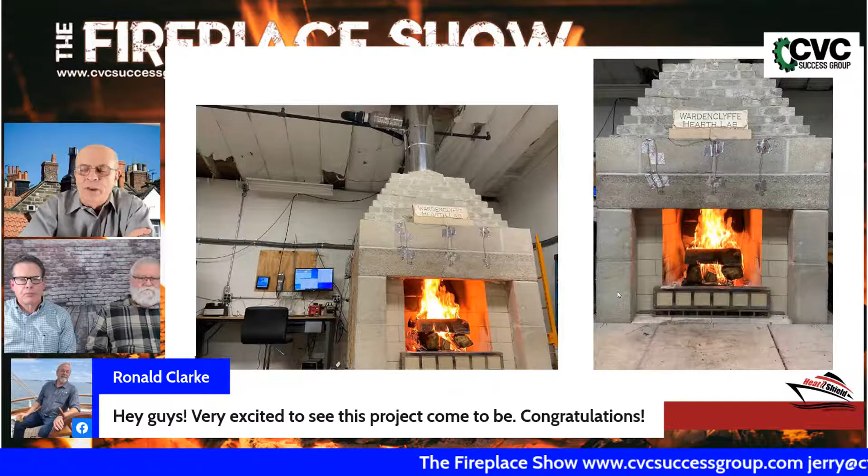Right. I think one of the things we need to point out to anybody watching this is this is one of the first looks that many people, even in the industry, have ever had of this product, except for a select few. So what are we looking at right now? What are those two pictures showing us? Well, that's just a picture of the lab, and shows some of the instruments and some of the stuff that we were doing to test the safety, efficiency, and the radiant heat output of the fireplace. Yeah, this is our lab, actually. This is the Wardenclyffe lab. So that's located in Richmond, Indiana, where your plant is, John. Am I correct? Yeah.

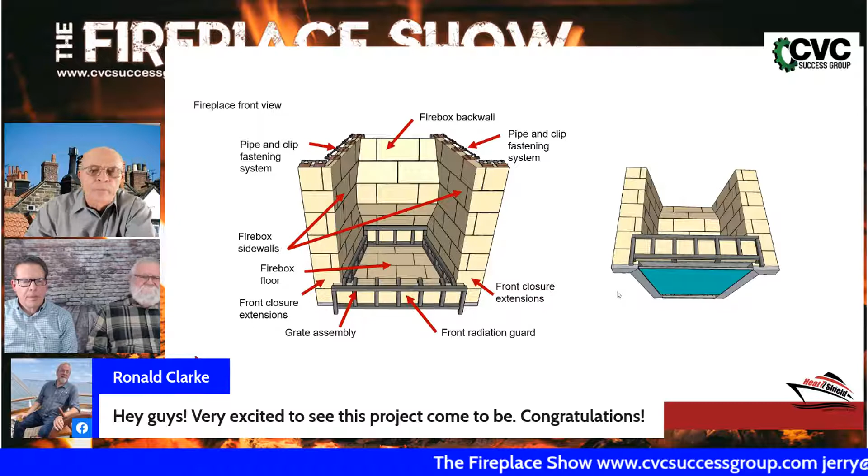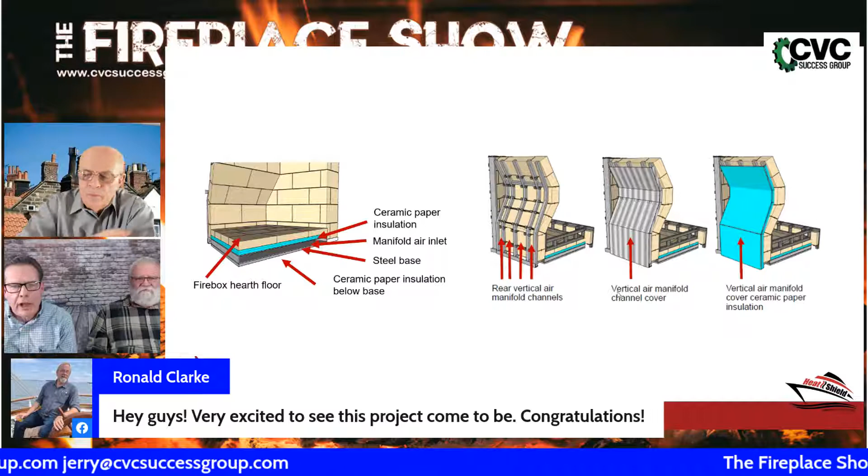Okay, so you ready for me to go to the next slide? Yeah, go to the next slide. And these are just some drawings that just kind of show you. These are actually some of the patent drawings we put together. But go to the next slide, because I think... Yeah, this is a good slide.

This shows the air movement underneath the fireplace and how it gets injected over fire on the back wall. So what's unique about this fireplace is there's actually no mortar joints in the back wall. So the mortar joints that you typically fill with mortar, we're using those to siphon in the air, and it gets injected into the fire, over the fire.

And so what happens is, as you introduce preheated air into the fire, at that point it burns off hydrocarbons or particulates or soot or creosote, if you will. And so it produces a much cleaner burning fireplace. Yeah. Okay, so let me identify this. Right now, we are looking at a side angle. So you're seeing the red arrows, there's 4 of them there on the left-hand drawing.

So Chris, one of your specific designs is a rear firebox wall that curves, or we could call it a belly, or I'm not sure what you call that, but we have a curve in it. So let's tell our listeners, why does a Prior Fire have this curve or this belly? Sure thing. This is actually modeled after some of Rosin's work. So technically you would call this a Rosin style fireplace.

And that bulge in the back wall actually acts much like the wing of an airplane. As you get airflow, if you figure the chimney is drawing the air, much like you would suck on a straw, it's being pulled up. So for the fuel bed and the fire to get around that bulge to feed the draft, it has to accelerate almost like the air moves over the wing of an airplane. It has to speed up to go around that shape. And it causes very good adhesion and also makes for extremely tall flames.

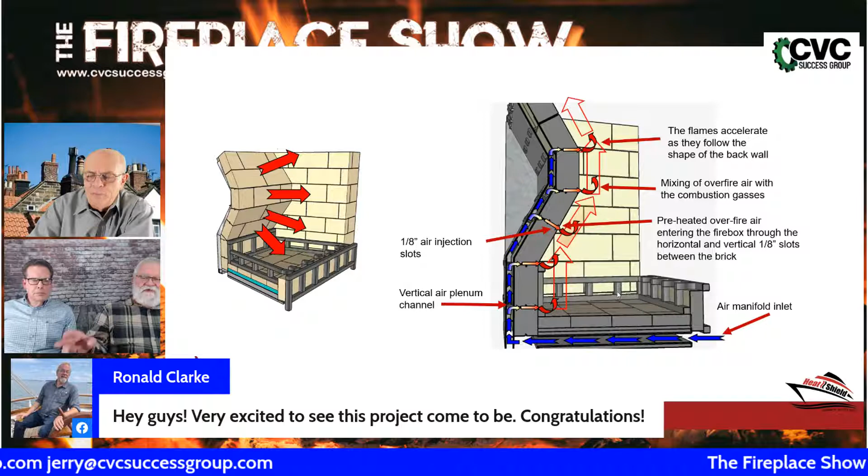So the air is coming in, and what you're saying is by adding this air to the fire and then to the smoking gases, we are cleaning up the atmosphere and discharging less gases into the environment. Am I correct? You're correct. And also far less particulate matter, which is something that EPA is concerned about. Okay. And you'll see an example when we move ahead in the slides a little bit about some of the testing comparisons we did between this unit and the other unit.

So this also helps direct heat back into the fuel bed, and it's another reason why we're getting such amazing combustion. That's right. We're making a little crucible where the actual fire takes place, and no under fire air. That's a thing from the past. You really don't want to have a grate with your fire sitting on it so the air could come in underneath it. The ideal place is to have the air coming in over the fire. That's the way to get the cleanest possible burn you can get.

Right. And I think that's something you and I both teach in our classes: there's a certain way for air to enter the fireplace and to enter the combustion process. Are you and I in agreement on that? 100%. Okay, good. Because I like to get Chris Prior to agree with me.

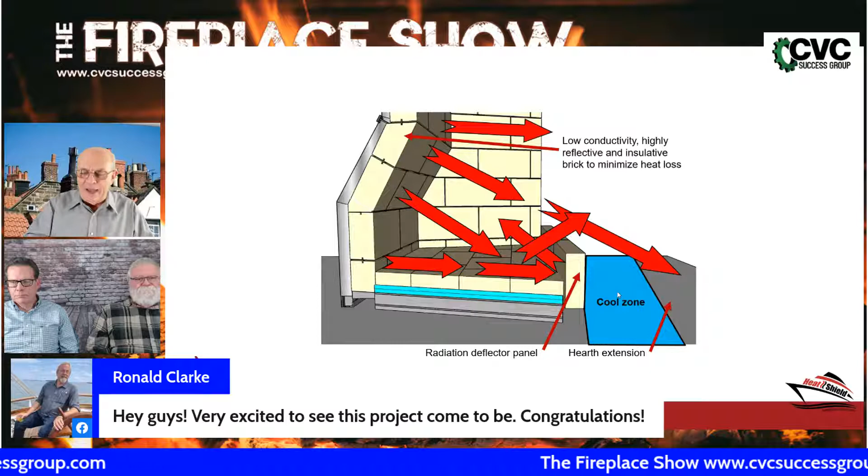Okay, well, again, the old adage, keep it simple, stupid, I suppose is a good one. What we developed here was a way to build. It's a very difficult shape to build from scratch. You've seen when we've done some of these new construction fireplaces with this shape. So for this system, all the brick are actually held in place with specially designed clips. So like for the sidewall, there's a channel that would go in that the brick would sit in, and there's a vertical channel at the back, and there's a series of tubes.

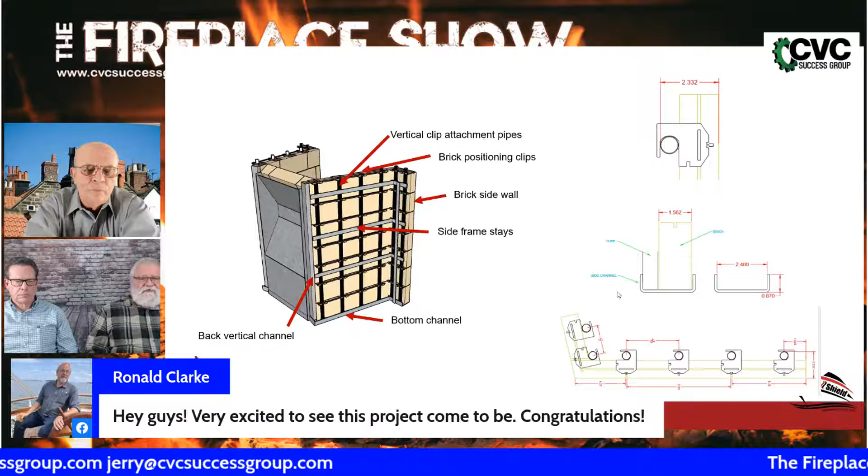And then what you would do is you'd build both the left and right side walls with the clips in them. And when you were done, you would grout it like it was a backsplash in your kitchen. You would take a clay mortar, and we squeegee it in with a silicone float and then wash it off with a sponge. So you don't have to have a complete full bed joint under the brickwork, because the clip is doing all of the work. So it completely simplifies the installation.

And like I said, you need actually no masonry skills at all to be able to build a perfectly set firebox. One of the things I want to point out too, Jerry, we use a low mass brick, which is lightweight. It's pressed vermiculite. It's a very strong one. It's a 7,000 psi brick, but it is lightweight, and because it's low mass, this thing produces a lot of

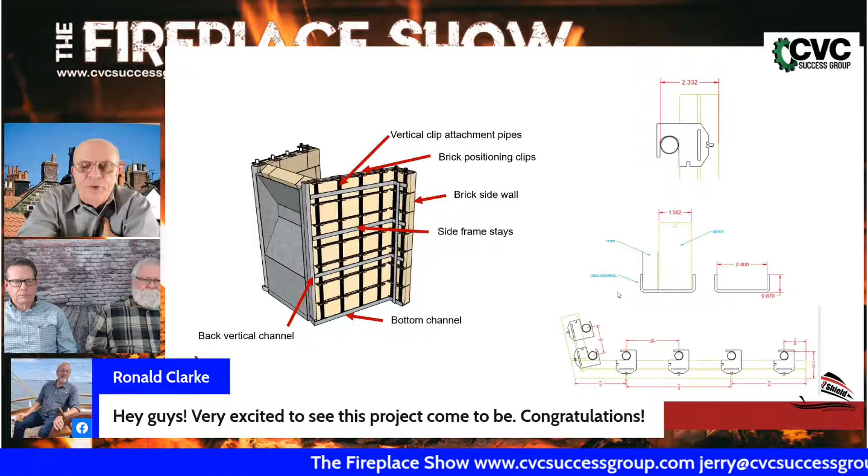heat. In other words, a high mass clay body or brick would absorb the heat. This basically does not absorb a lot of heat. It's insulated as well, and so it just keeps a lot of heat in front of it instead of absorbing into it. John, let's identify. You use the word vermiculite. And now, I know that's an insulator, but let's make sure people understand what vermiculite is.

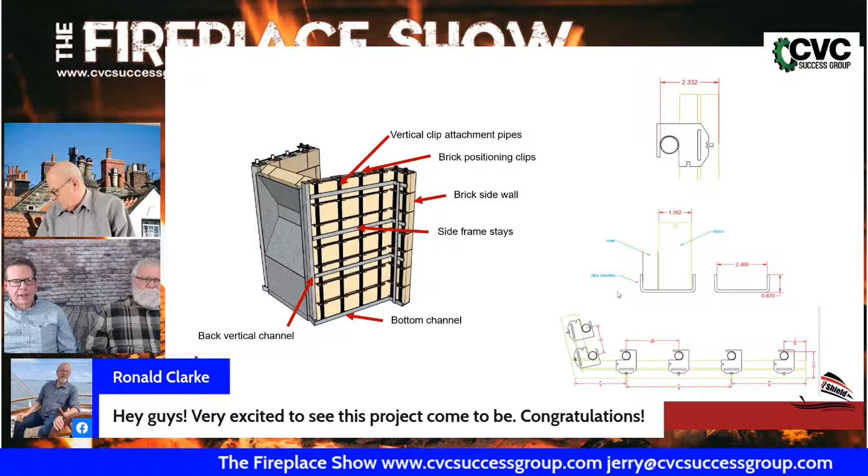Well, it's an expanded mica. It's mined and then it's heated and it's popped like popcorn. And then it's pressed with a binder in a mold, and that's how they make the bricks, under a tremendous amount of pressure. Gotcha. They look like a regular fire brick, but they're very lightweight, very insulative, and non-conductive. So you get instant heat with it.

And the other thing from an installer's point, I know there's probably a few installers out there. It's also very lightweight. So the entire unit is what, 250 pounds and ships in 10 boxes. So nothing weighs over 25, 30 pounds. And ships UPS rather than common carrier. So one person could easily do this, and within a day you could have the whole thing built.

Right. And I heard you say a while ago, the skills that are required are the ability to read your directions, comprehend them, and mechanical skills of fastening. Would that be a good synopsis? Yeah, I would. This is designed to be professionally installed. You have to have basic fireplace knowledge and tools, and a lot of times you would actually remove the damper frame and the back wall of the fireplace to make room for this unit. So it's probably not something most homeowners would want to tackle. But from an installer standpoint, it's a little easier. So it brings the cost down to the consumer.

Right. Well, John, as Chris pointed out, we're looking at the rear wall of that fireplace. And like Chris said, to build a PriorFire out of brick requires some very close cutting and a lot of masonry skills. Would that be correct, Chris? It would be very correct. And in this situation, the back wall is actually the easiest thing to install, the way we have the pretty innovative clip system that holds everything in place. It's pre-engineered. We've made it so that for an installer, it's something they can easily do in a day. And they're all pre-cut, so everything is perfect. You really have no on-site modifications that you would need to do.

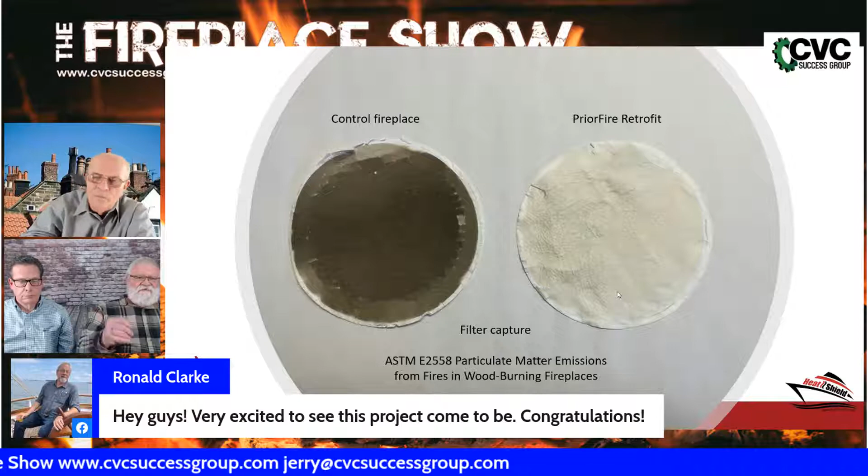the front half. So every 7.5 minutes, you put first the back one in, 7.5 minutes later, a front crib, then a back and a front. That happens 8 times an hour for 14 straight hours. And then at the end of the 14 hours, they do what's called the flash fire test. They take 4 of the back cribs and wire them together, and 4 of the front cribs and wire them together. And you put all 8 of them in at once as one fuel load.

And they watch all the temperatures on all the thermocouples and the stack temperature. And this is what really separates, can you say, men from the boys? You're still allowed to say that in this day and age.

Well, anyway, that's where a lot of fireplaces fail. And that's at that 14-hour mark. And then the test stops when the temperatures on the thermocouples all level out and start to fall. So it was a 20-hour test.

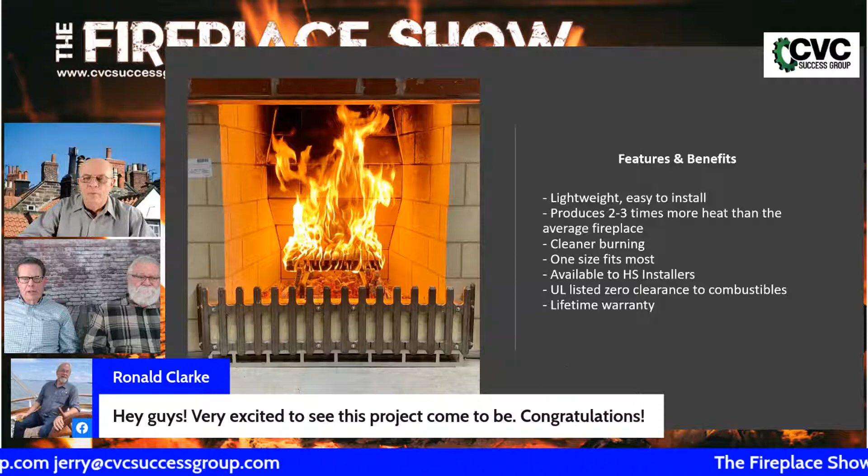Okay, John, are there any more pictures in this PowerPoint that you want to show? No, I think that's it. This kind of gives you the highlights of some of the benefits of the product there on the last slide. Right. Okay, so let me get back up here. So anyway, we got a lot of comments. So you'll know, guys, if you're listening, when we're showing the PowerPoint, I can't manipulate. So let's show a couple of the comments here and answer some questions.

So this is Stephen Scaly. He's making a statement: this has been a long time coming, and I believe he has a question. So, Chris, John, do you want to answer Stephen's question for him? Sure. The back wall is a 2.5-inch wall thickness on the back wall brick. So it'd be the equivalent of standard fire brick in the shiner position, and that means it's standing up on end.

Okay, good. And then we have a question here from Jason Avery. Does this provide any clearance reductions for the hearth extension? Yes. Again, you can have 4-inch nominal masonry with wood underneath it, even in the hearth extension. Actually, we probably could have passed with even less than that. Because we were so far under the max temperatures, we're going to retest it with just 2 inches of floor brick.

Okay, so let's identify this, Chris. You use the term, you and I both know what it is, which is nominal. And nominal means it can vary from actual by 1/2 inch. So when you say 4-inch nominal, it can be as thin as 3.5. Am I correct? Yeah. We were using, it was actually 3.5. It's almost like a 2x4. You go buy a 2x4, it's not 2 inches by 4 inches. Right, that's a dressed one.